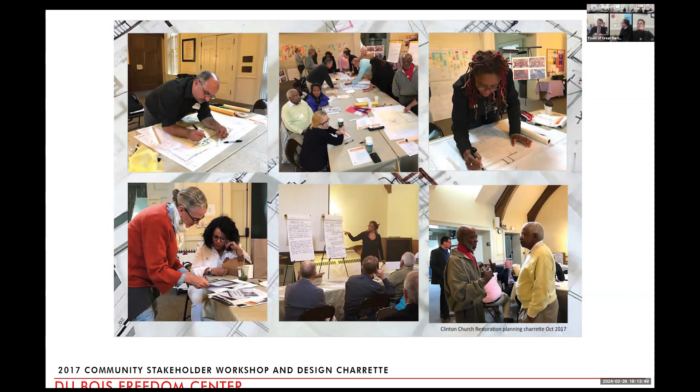The project has strong backing and support. It's received widespread community support locally and more than 24 grants from public and private sources to fund design and construction. The center has worked closely with the Massachusetts Historical Commission at all stages of the design process, dating back to 2017. All design and construction work is being done in accordance with the Secretary of Interior standards for the treatment of historic properties.

Finally, the center is an important economic resource for Great Barrington, having already brought in millions of dollars in new funding that will benefit the town and the Berkshires through realization of this project. Once open to the public, the center is poised to continue contributing to the local economy by attracting visitors to spend money both at the center and in the local community.

It keeps the wall there relatively low. At its highest point, it's about 2.8 feet in the very far back corner. As it comes out to the street, it transitions from that 2.8 feet at about the midpoint, about 2 feet tall, then transitions down to about 0 or 6 inches tall. If the sidewalk were to stay, that wall would have to be about 4 feet, since the sidewalk pitches toward the road, making it higher on the wall side.

We would need a railing because the walls would be so tall that you'd need one. Right down there, they don't require a railing. So it'd just be a real barrier if we were to put a railing in and keep the sidewalk. This really makes the site much more aesthetically pleasing and solves a lot of other code issues as well. So that's why we're proposing that.

Next slide. This image is from the front, the northeast corner of the building from Elm Court. I just thought the slide was important to explain why this configuration was being proposed.

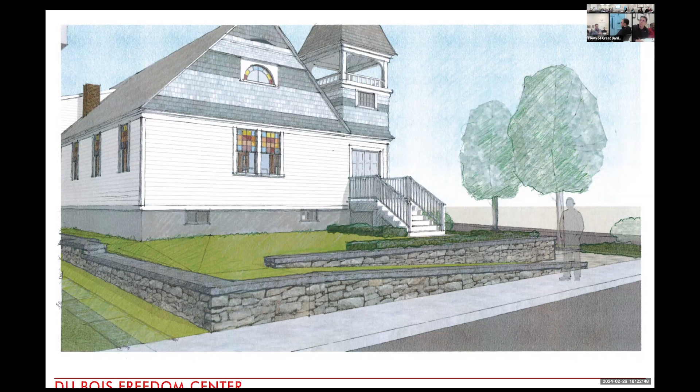You can see the thin green strip starting on the right-hand side coming up. That's proposed to be a very gentle grass pathway that will allow people to access the front lawn area, which was historically a gathering space, to socialize, et cetera. In order to do that, for handicap accessibility, we have to keep that slope to 5% to go to the new grade.

Glenn will talk a little bit about raising the building 2 feet because there are water issues and significant headroom issues in the basement, which has historically been used as a gathering space. I won't steal his thunder, but that's why we're sloping up right there.

So the walls in the front there, on the right lower corner, just for visualization's sake, that's about 1.4 feet tall. So it's pretty low, we're not talking anything too big. That is generally the description of why we're proposing that configuration.

And I think with that, I'll turn it over to Glenn to talk about architecture.

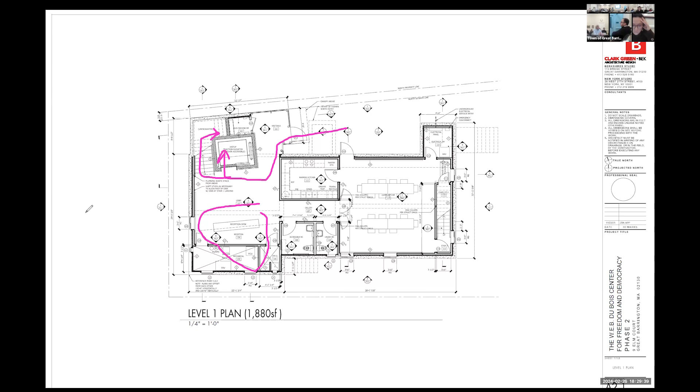You come into a lobby space, with the elevator and the base of the stair right there. There's a small counter to greet you. People will be there also to provide information for other historic sites on the African American Heritage Trail. There might be a little section of gifts, a little gift shop, and of course, where you buy tickets.

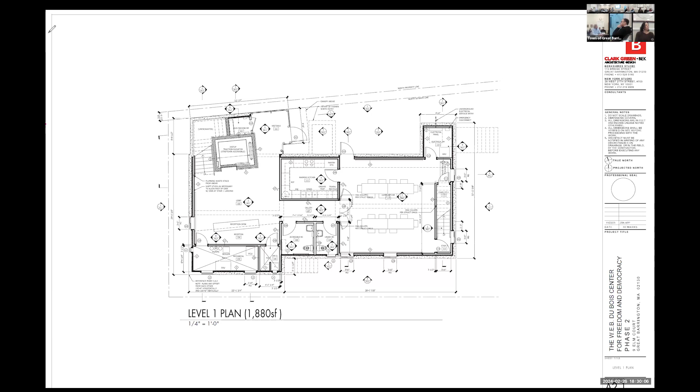Now, to the right as you come in, there's a couple of bathrooms, and then you come into a multi-purpose community room with a small kitchen. There's always been a kitchen down there, and I think that will be an important continued use. So then you rise up to the next level.

The main level, you arrive in a gallery space that used to be the historic parsonage and vestry. There'll be exhibitions to inform you of the use of that space. But then you turn and go back into the sanctuary.

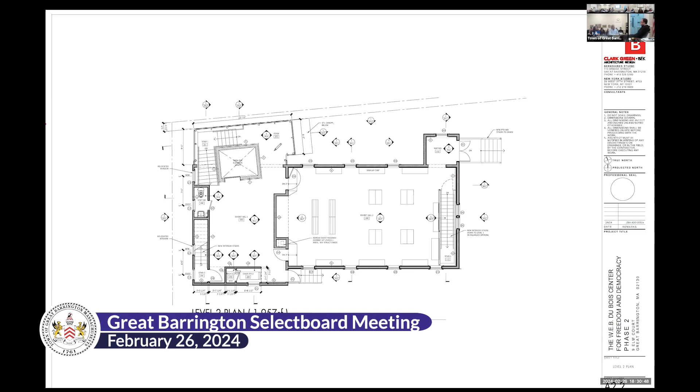That's really the primary exhibition space, with a series of movable pylons or exhibition cabinets that can be arranged and configured in different ways, but can also be moved into places at the side of the room. The space can be used as a gathering space, so we can have chairs for meetings, concerts, speeches, lectures, that kind of thing.

The front entrance is remaining, but it's really remaining more as an exit than as an entrance. It's important as the historic entrance, as the public face of the building, part of its history, welcoming people there. It's beautiful how they located it in the belfry, which is there to grab your attention architecturally and draw you in. But functionally at this point, it's important to have it as an exit.

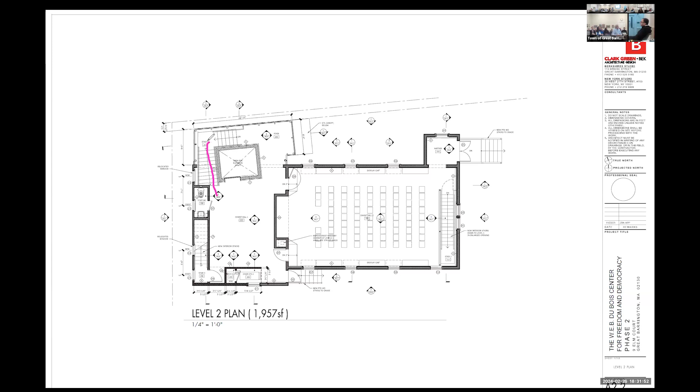So the stair that leads to the upper floor is up the top left-hand corner. That takes you up to the upper floor, which is an office area, but it's also got a small space with an oral history recording studio where people can not only experience this whole building and its history, but they can add their own stories to it. So it's a place where people, after having reflected on this experience, can give their own experience and add that to that history. We feel that's a very important use of this upstairs space.

And it's the perfect culmination to your experience as you walk through the building.

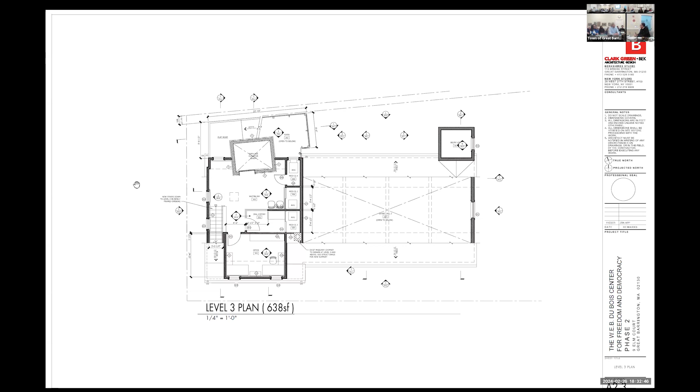So the building is being raised 24 inches, but we didn't want to have 4 feet of foundation exposed out there, and National Historic doesn't want us to have that either. So to maintain the historic character of the building and its presence on the site, we decided to raise the grade around it up to try to maintain that level of foundation. To do this, because of the constricted nature of the site, we need some low walls, and we're proposing right now that they be dry laid stone walls, something very typical of New England towns—there's one right around the corner of the street, actually.

This little sloping path in the front is a 1 to 20 slope. That means it's not a ramp, not a handicap ramp. It doesn't require handrails. Not only that, but it's the primary way that everyone goes up, so we're not dividing people into steps and ramps.

If you could go to the next slide. The main entrance—we're using these walls to draw you in, after you've seen the historic face of the building and preserved that as a memory and an introduction.

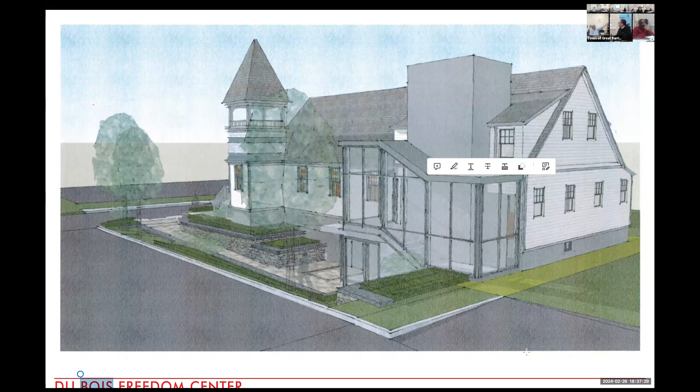Oh, right. Right where the little bar of icons is, the window in the dormer.

One caveat to this is that we are looking at the geothermal as a heating and cooling system. The wells would be in the front lawn, but they'll be below the level, so it's still going to be a usable space. However, we won't really know if that's going to work until they get out there and drill a test hole, and it's got to be a very deep one.

If we can't do the geothermal system, we will probably have a mechanical unit that will need to go on the roof of the addition, behind a screen that will screen for noise and be a more visually attractive screen than just seeing a mechanical unit. Because of the constraints of the site, there's nowhere else to put it.

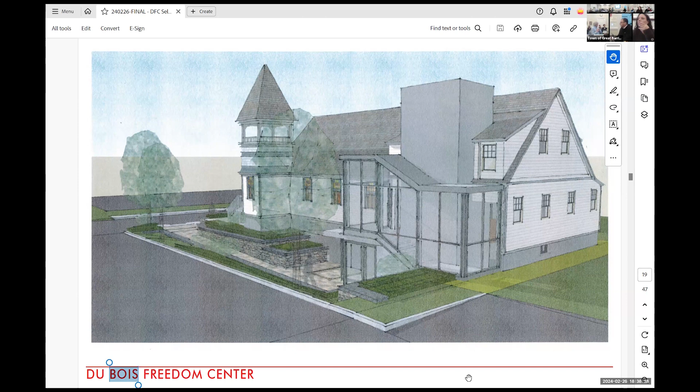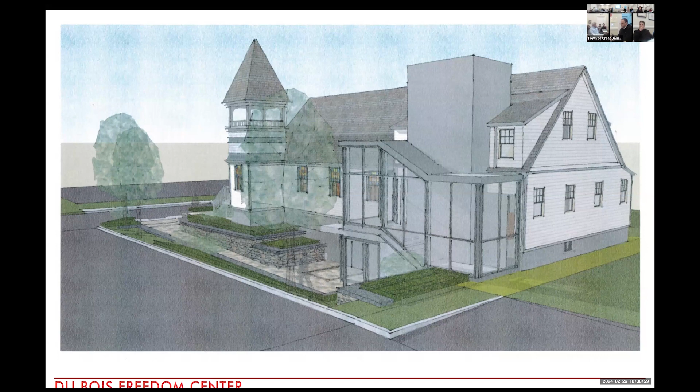That concludes our part, and I'm happy to answer any questions you might have. Well, thank you both, Steve and Glenn. At this point, I think we're happy to answer any questions that the board might have, and provide as comprehensive responses as we can.

Go ahead, William. Just real quick, what's the sliver of grass where you're proposing to take the sidewalk out? What's the measurement of that, the width of that patch of grass, the buffer? 5 to 6 feet. 5 to 6 feet of buffer.

Okay, Eric? Yeah, just a few questions, more for my curiosity than anything else, but the mechanical unit that you'd be screening on the top, are we discussing a heat pump, or what kind of mechanical unit are we talking about? Yeah, it would be a heat pump, but it would really be for air conditioning.

Rather than be sized for the whole building's heating and cooling, all the other mechanicals would be inside, along with the geothermal if that works out. Yes, the great thing about the geothermal wells is that we could eliminate that unit and we wouldn't have any exterior equipment. Yeah.

And then the other thing, back to what Lee was talking about, and I think you mentioned it but I might have missed it - that patch of grass from the wall to the roadside there, how pitched is that?

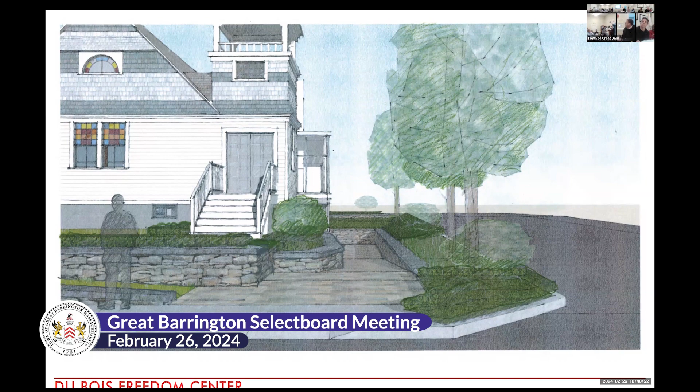So we're dropping down, trying to minimize the height of that wall. Yeah, so it slopes down pretty significantly - it's like a 3 to 1.

Yeah, you might not have - I don't know if we stated it, but the site actually has a natural slope up from the east to the west, and it's about 3 feet. So even though our sloping path is only going down 2 feet, by the time you get there, the street has risen 3 feet.

So that's why towards that northwest corner, that's really the space where the difference in those two makes a retaining wall. And then I guess this is probably a question for everybody, but as far as the liability of that goes, since that's a sidewalk on town property with a severe slope in wintertime, where's that liability fall if somebody happened to slip on that slope and go down?

As far as, is there going to be a transfer, since it's town property currently? Right, so - and this is part of the application package.

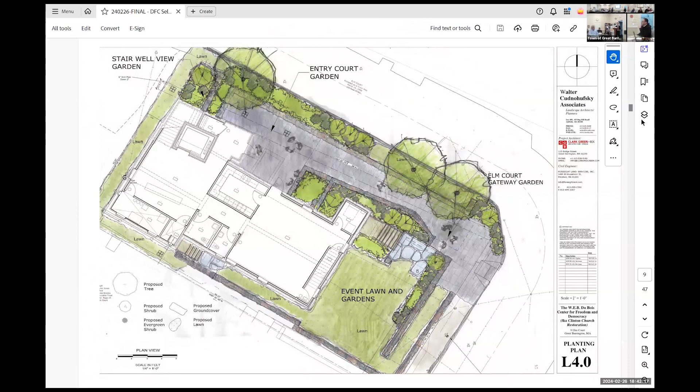Included at Exhibit 2 in the original memo as an attachment was the draft license agreement between the center and the town. And also just for purposes of reference, that draft license agreement included as an exhibit a very specific and dedicated plan identifying exactly the location and all of the dimensions of the town's slice of this property.

Yeah, and so the license agreement is proposed to do a few things.

Obviously, it's subject to recommendation and endorsement by the select board. We have talked with our town administrator staff here over the last 7-8 months. What is intended is to allow the center to improve and use this area for purposes of landscape improvement, without technical structural improvement, for the purposes that project envisioned, and to facilitate it and allow it to happen.

Part of that is providing insurance and representations about insurance for liability, public liability purposes and so forth, so that it will not be subject to liability on behalf of the town. So that is a provision in the license agreement.

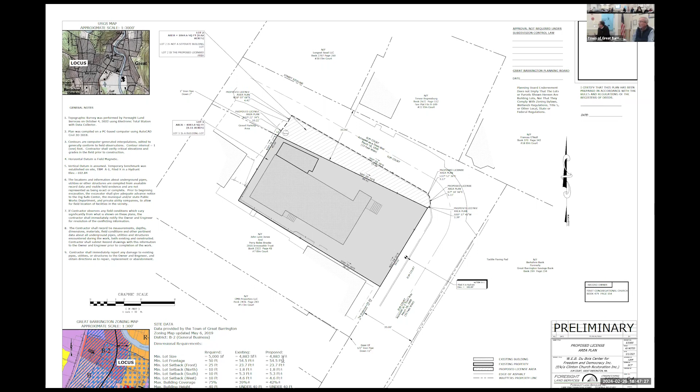We have looked at the entire area in this neighborhood. It's covered with asphalt, concrete, and in poor condition, frankly most all of it. The intent is to create, as I referenced, placemaking - a place that's intended to be welcoming. It's intended to not have that institutional effect or highly structured effect. It's intended to be welcoming, it's intended to be inviting. This is an important aspect of that design that helps tie in the entirety of the site.

Sorry for this long-winded explanation, but it helps give some insight as to how the entry point, the aesthetic, serves not only an aesthetic purpose, but also very much a functional value, to allow the building to serve its exact purpose.

So then just, if you guys don't mind me asking a little bit more - just the total capacity of the building, like if you have a big event, just the number of occupants that can be in there - do you know that?

That's more, there's probably things in there. Yeah, we'll come back to that.

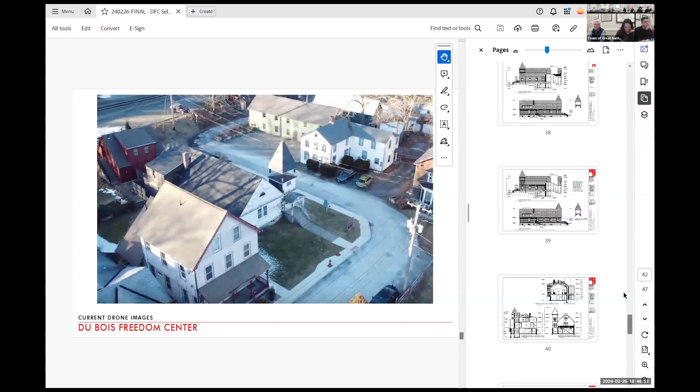And we provide those. Just curious, because it looks like a big space. I'd also add that we've already had conversations with several of the other nonprofit organizations in the community to partner with them for anything that we believe will exceed the capacity. For example, this past Thursday when we had our reception, we partnered with St. James Place. So we are going to be very mindful of using it in a way that it was originally used, but knowing that it's a small but mighty space.

One of the things that I wanted to point out is that what we are adding is all circulation space. We're not adding additional space that would increase the occupancy from the historical.

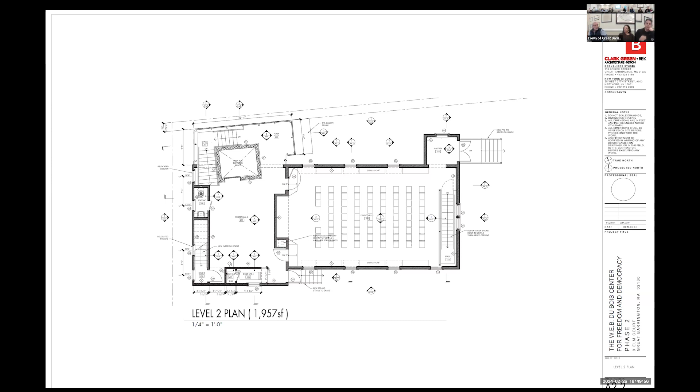When you were saying like bus trips or Greyhound, somebody shows up, what would be the plan? Park on the side street, or just exit people, or I just was wondering if a bus pulls in there. This is a dead end street. Just wondering the general thoughts on that.

We typically have parking arranged in the past for parking offset, because we've had tourists coming over the last 6 or 7 years. And on weekends more tends to be arranged for us to have the students dropped off in the parking lot behind town hall, and they just walk over. Last fall, National Heritage Areas, we had 80 people come in a couple of groups, and we arranged with the First Congregational Church to have people dropped off in their parking lot until each bus is there. We split into 2 groups, came to our site and River Walk, and then switched and came back. So we'll continue to make arrangements.

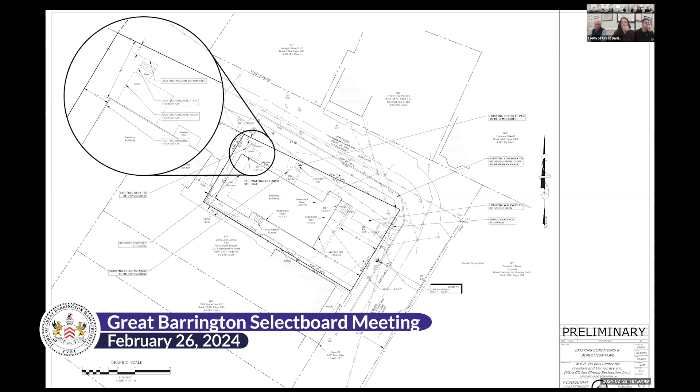You can't bring a bus in, that's what I was thinking, since it's not a through way, as you know. So we'll arrange for that and have on our website, like the Mahaiwe does, a map of downtown and public parking spaces that are available.

And then just one last question for my own curiosity. I see on this one set of prints that for your pathways going down and stuff, you have indicated a snow melting system. Is that going to tie in with the geothermal, or is that like an electric heat plant? Like would it be hydronic?

Yeah, that system, right, we can tie it in.

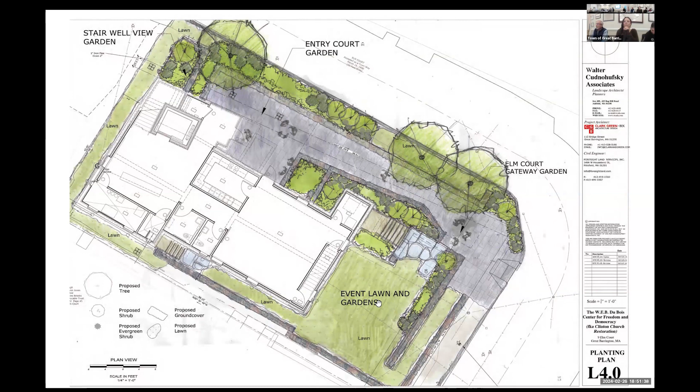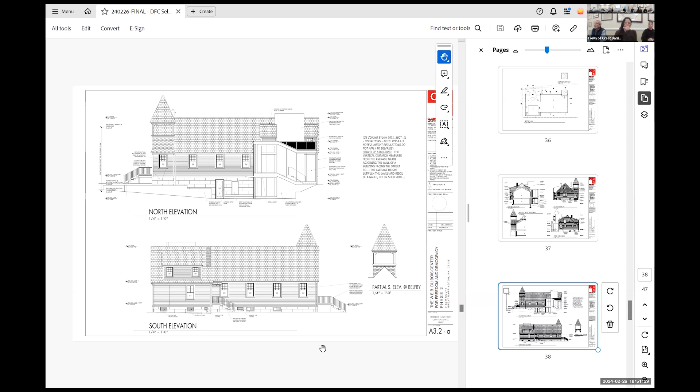I was just curious, you said you may have to put an element on top of the building. Will that conform with anything else? Is it gonna look like a sore thumb, or are you gonna make it look like it's part of the building? It will not be a sore thumb, but it will have to be a screen that allows airflow. We can't increase the size of the building and put it inside. It has to be somewhere where it gets outside, free flow of air, so it needs to stay pretty cool. So it will be some attractive screen that will be keeping with the rest of the addition.

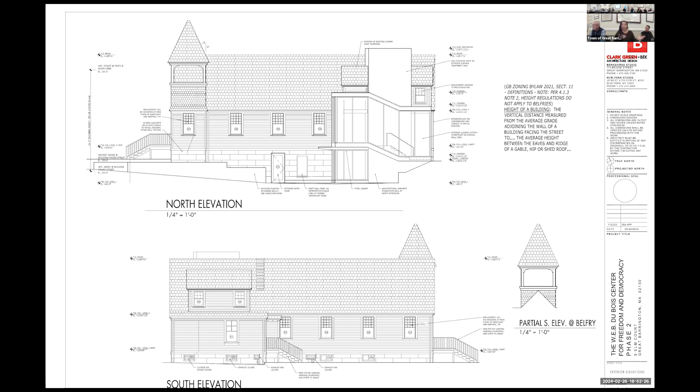Just to clarify, because there have been concerns from some members of the community about losing a sidewalk, I just want to reassure people that might be listening, if you could briefly talk about the traffic that is usually on that street, the fact that it's a dead end, and speak about the pedestrians that would be losing a sidewalk, where they are expected to go without one, just to calm some nerves and concerns about that, because I think people don't realize the nature of the street. So if you could just maybe address that.

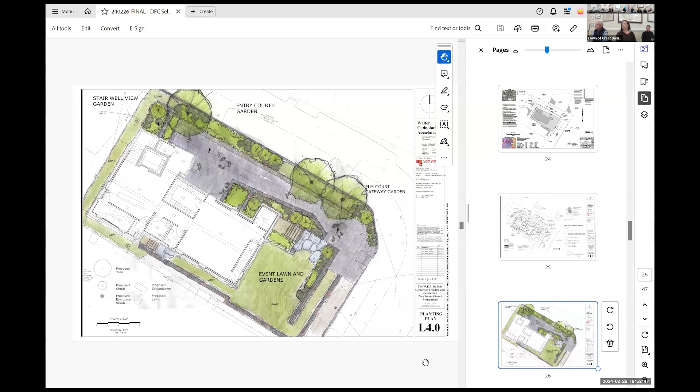Sure, so I have observed intentionally, numerous times, the traffic on Elm Court just to sort of scope it out. And I'm not sure if a car has gone past me anytime I've been out there observing the traffic, and I counted them 6 times. So every pedestrian that's been on that street when I was out there is walking on the road. Really, in my observations, half a dozen trips out there specifically to do that. That has been my observation, but I felt that we should get that into the record.

I just want to add that in the reimagining of the space, we're also trying to keep to what it would have been in the past.

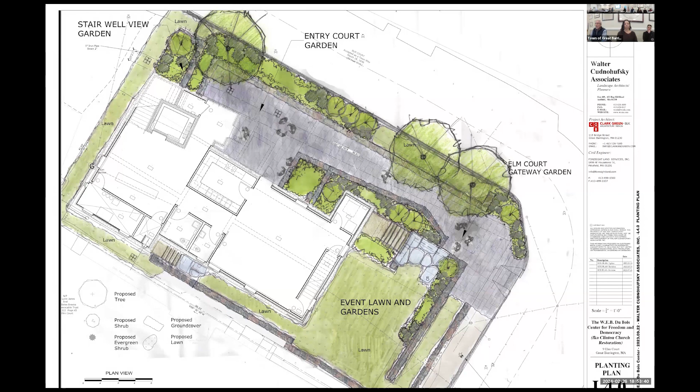So if we think about someone coming in 1887, even though we know the town has made this investment—it's why we've done the research to have these conversations—how can we return it to the place that it was? So when someone enters it from a point of reflection, we transition from the hardness of the outside into the learning environment, the peace, the community of the inside. We've been very thoughtful about what this means and how it will impact things.

Just today we were there, and everyone was walking in the street, whether walking their dogs or walking with them. So we've been studying it via drone and other opportunities to see what the use is right now vis-a-vis the town, and those who are living on the block versus those who will visit the block, to really make sure we were deeply aware of how we can do this in a way that is respectful of both visitors and residents.

We just wanted to put some additional context to the sidewalk. We understand that obviously we've already got the improvement, but it's important to note that during the 137 years this building has stood, the sidewalk was relatively deeper, and there was no sidewalk plan until less than two years ago. We were working the plan to kind of deal with it, and then we'll carry the sidewalk work forward.

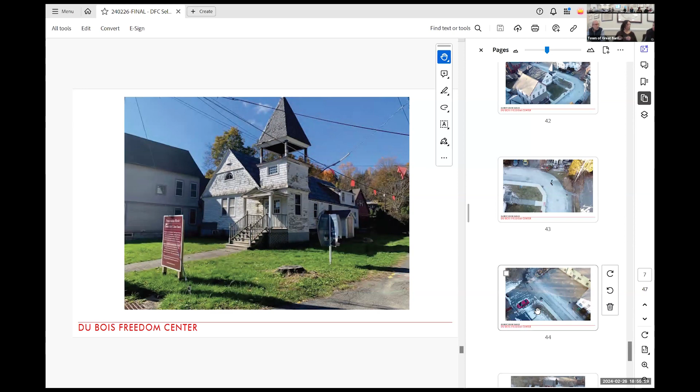Anyone else on the board? Maybe, yeah, just a point for discussion, that's all. I guess I only bring up the sidewalk issue for the most part—I walk that road all the time, and I personally have never stepped foot on that sidewalk either. My concerns in the beginning were based on just not knowing what you'll see with accidents, and that's why I was concerned about the slope and cars—whether somebody accidentally thinks they're in reverse but they're in forward, or vice versa, coming out of that one parking spot by the house up the street. So that's why I was concerned about the pitch. I'm not so much personally concerned about the removal of the sidewalk for that reason, but it sounds like the liability stuff's all been thought out and approved by our lawyers, and obviously it's a beautiful site plan.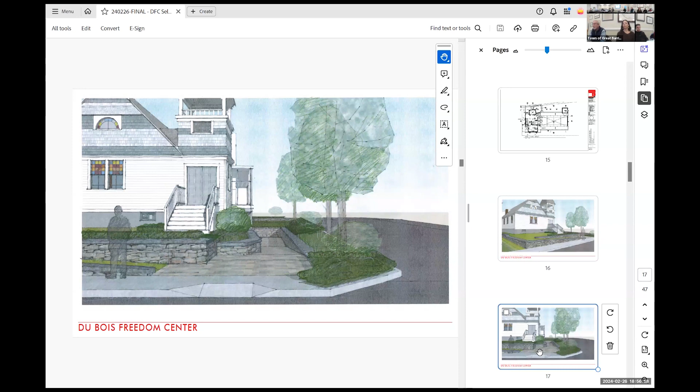If I may say, as the person who's given a lot of tours—most of the tours in the last 7 years—when you give tours, whether it's 6 people or 40 people, people stand in the street, and I'm always getting on foot telling them to move in. I do think the new entry port will in fact be safer, because it will bring people who are gathering and waiting for their group, or listening, into a space off the street.

So the select board has asked their questions. Is there anyone in the audience, whether virtually or in person, who has any brief comments? Yeah, go ahead, Paul—just introduce yourself, name and address.

Paul Ivory, I live on Grove Street. Good home. I want to speak in strong support of the program that you referred to, DFC's, which was presented to preserve this landmark and renew it as a museum program space. I've been a volunteer since its inception, and I have a perspective in looking at this organization.

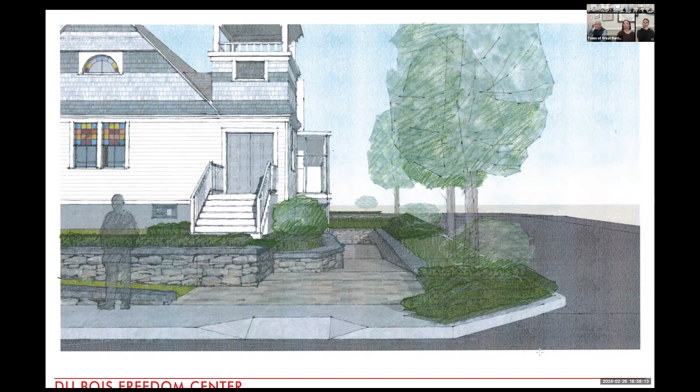I have 50 years of working in historic preservation and museum fields, including a career with the National Trust for Historic Preservation, and as a museum and historic preservation consultant. The UAME Church is a gem, and what these folks are doing to preserve it is wonderful. The church is a reality of great Barrington's African American history—it's a magnificent artifact with important architectural, religious, political, and social connections. Great Barrington is blessed with a fantastic catalog of historic assets. A couple of years ago, as chairman of the Historical Commission, we completed a historic resources survey of some of the sites in town, including this one.

And that's just one small chunk of it, and I hope that the Historical Commission will continue with that project. But the historic sites give us our identity, they're important for the local economy, and it makes Great Barrington such a great place to live.

As a witness to this organization, the DFC has seen amazing success. They have good people, their planning has been textbook, and their fundraising is enviable. I do think with their planning, they've taken over the years talking to people at the grassroots level and a range of planning sessions, they've been able to give this organization the great direction it's been following. I do think it will make a great case study at the Harvard Business School, the way they've done it. It's just been amazing.

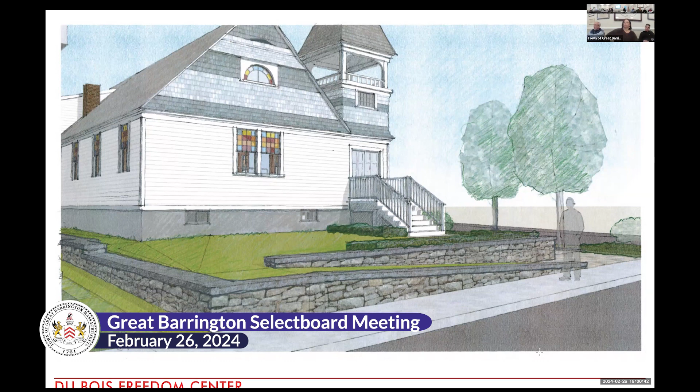And what you see tonight with this program and design is a result of professional level planning by a range of professional folks: architects, landscape designers, capital campaign consultants, architectural conservators, working with the Park Service and the Mass Historical Commission and so on. CGV's design, I'd say, is ingenious for artfully fitting so much into such a small space while maintaining the historic fabric and design of the building. It's very well done.

I was going to use Dolly Parton's term about fitting 10 pounds of potatoes in a 5-pound sack. They've done a magnificent job fitting a program, translating the program into spaces. And I'm sure that this will be a destination site of public interest in African American heritage and W.E.B. Du Bois for many years to come.

I'd like to make one last comment on the sidewalk. I live on Grove and Warren Street, and 2 years ago the town tore up all of our sidewalks and didn't replace them, and we used Grove and Warren as the walkway. So there's got to be some sort of precedent there. We appreciate your support in this project. These are good folks. Thanks, Paul.

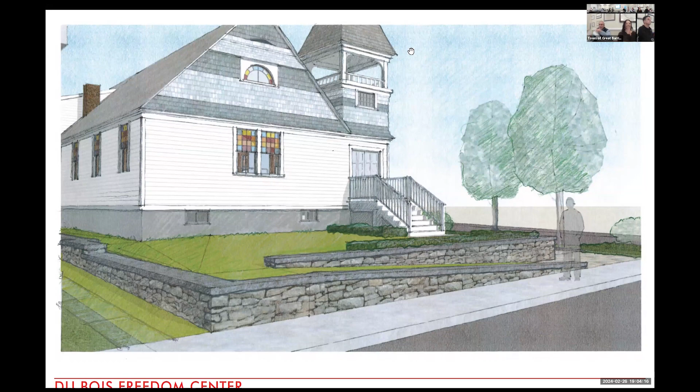I have one moment of comment. Just want to say thank you, but also wanted to thank the town and the board for my recent appointment to the Legacy Committee. I look forward to working with you and the town to continue our celebration of Dr. Du Bois. Thank you. Thank you very much.